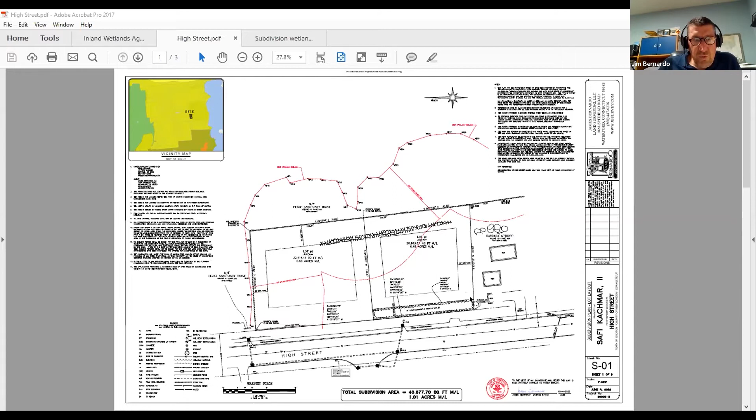So you can see from the PDF file, the red line with the numbers by it, those are the wetlands flags. And then I've indicated the 100-foot upland review area. This is an RS20 zone.

If we move to the next page, there we go. We're not proposing any activity, obviously, in the wetlands. It is on the adjacent property, as I said, but he'd like to subdivide this into 2 properties with 2 pretty moderate size houses. He's proposing like 1,200 square foot capes with 2-car garages.

There'll only be a small amount of activity for grading in this area for the construction of this one house, and then the installation of footing drains for the house, for both houses going off the back of the slope. We've indicated we have silt fence at the limits of clearing.

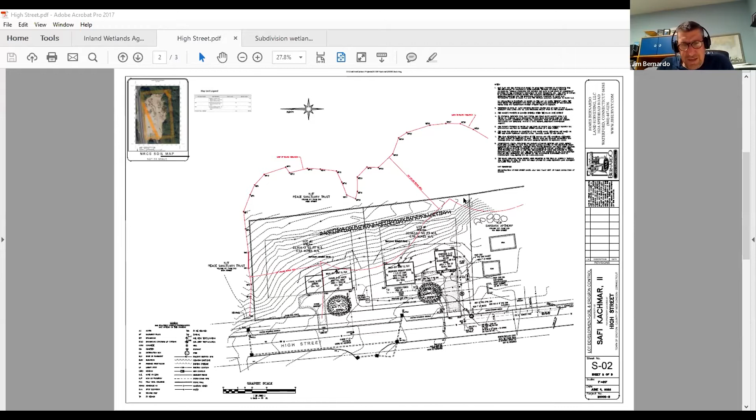This currently now is just all vegetated because of the repairs and the remediation that was done with the previous permit, so there's no tree clearing or anything. It's cleared all the way back to the stone wall on the back property line. The current property owner pretty much bought it in that condition. He kind of inherited some problems there that he wasn't aware of, but he did apply for a permit, he did remediate the slope and stabilize the slope. There was a plan prepared by Ed Wenke last year that the commission approved, and he did go through with that work. So his intent is to try to subdivide this into 2 building lots.

There's no activity in the wetlands, just some minor activity with regards to grading and some discharges for footing drains in the upland review area.

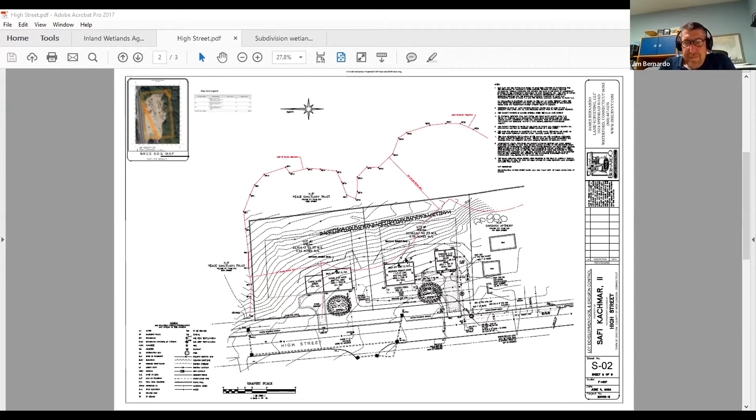Question: on that one lot, I guess it would be the southerly or west, is there a separate garage? Is that what the 2 buildings are? Yeah, this is a detached garage.

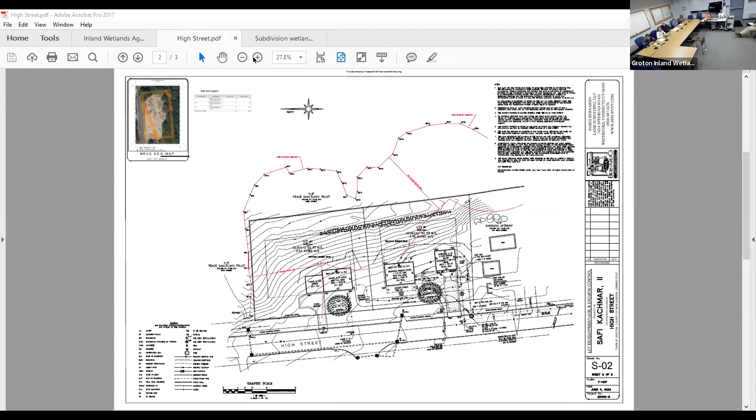Let me see if I can bring it in for you a little bit. Here we go. Yeah, this is a detached 2-car garage. This is a little cape, about 1,200 square feet. And this one here is also a cape style house, but this one has an attached 2-car garage to it. It's my understanding that he is actually building this for himself, and this is the configuration that he wants. The other lot would be for sale or for his development and for sale.

And then one other question, in that part of the upland review area and the grading that we see, is that already there? Is that part of what the remediation was? I didn't think it came all the way up there. What he did was put in this stone, I guess it's a retaining wall, a stone slope down here at the bottom to hold up the hill. And this is the existing topography from that remediation, correct? What you see there, that's an as-built condition.

Would it be possible to site walk this and see what it looks like now, since we had the pleasure to be out there before? We could. And if we did site walk that, would it be possible to put the corners or mark where the footing drains are gonna be? Sure, we can do that for you. Just the footing drain locations?

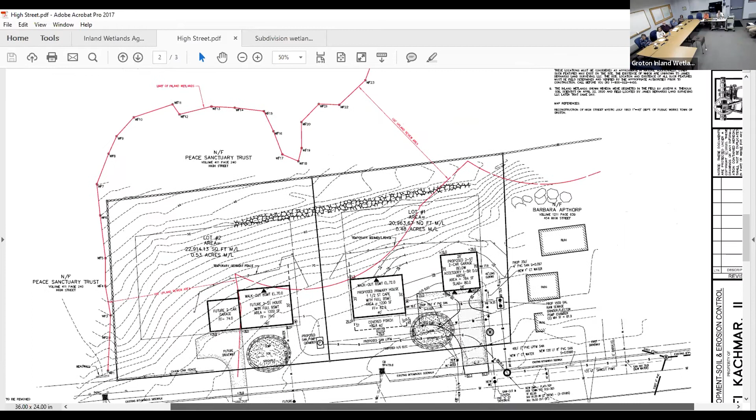And then one other question, the houses, the way you have them shown there, are they at the setback, the required setback for the road there? Yes. Or they are back, or they're at that point? No, they are at the zoning, the required setbacks for zoning. Got it, okay.

And something I might also want to note, it's not really your consideration, would be under the planning commission's review for subdivision: they will be extending the municipal sewer. It actually stops down here, and they will be extending it up to the site. Both these houses will be served by the municipal sewer system, there'll be no on-site septics for either one of these.

That true with water also? No, the water's there, here's the water line in the street. So the water line is there, they'll just be making some taps out to the street for the water line.

That red line, the 100-foot line. Yes, this one here, yep. That small garage, completely out within the 100-foot? Oh, it is, yes, this is correct, on that lot that is buildable. Yeah, well, that is outside of the upland review.

We have others that we're going to look at. Or do you want to wait? How do you want to plan? We'll let you know when we're coming. Okay, all right, that sounds good.

Will that be a weekend site walk? No, it'll be during the week sometime, after 3:30. Oh, we better do it soon, we change the clocks pretty soon, it'll be dark by 3:30. Oh yeah, I forgot about that. We don't want to think about that though.

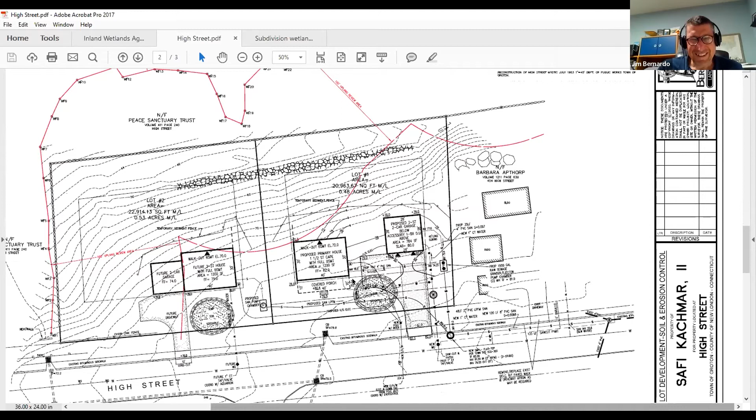Did you want to determine that site walk date and time now, or? You know, Tabitha, I'm thinking this next application, they will also want to walk, so maybe when they see, they'll figure out a time and a date.

Quaker Farm. Quaker Farm.

Good evening everybody, Greg Hanover, Director of Public Works for the town. Online I have Shelley Plude, a consultant with SLR, formerly Milone and MacBroom. You might be more familiar with that firm name, but they're now called SLR. I'll give a brief background on the project, and Shelley will get into the details of our proposal. Quaker Farm Road, if you're not familiar with it, is off of Lambtown Road, pretty close to the Ledyard town line. The culvert there carries Haley's Brook under Quaker Farm.

It's a twin 5-foot diameter corrugated metal pipe, two 5-foot diameter pipes right next to each other. About 2017, I got a call from our highway department that the road was kind of settling at the culvert. So I went up there, and the top of the pipe had dropped about 4 inches from the head wall. The whole bottom of the metal culvert had just rusted away. So the road was starting to cave in, and without a full pipe, you have no structural strength at all. So we immediately closed the road back in 2017.

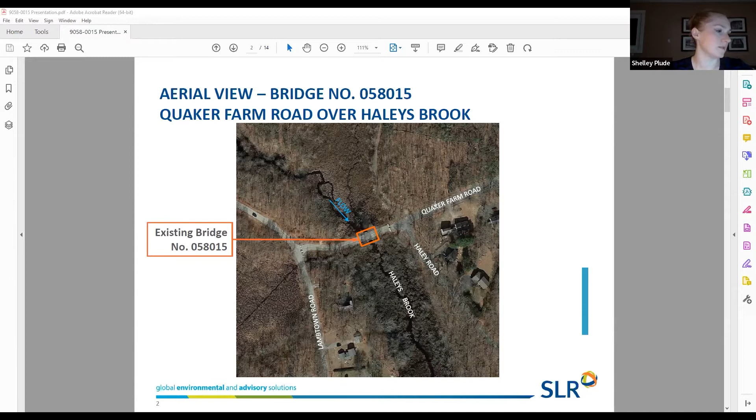So Greg already gave you a quick overview of where our project is located, just a quick aerial. It's an area that has a great deal of wetland areas. I'll show those more clearly on the next couple of slides, but Haley's Brook winds and bifurcates. There are a few splits in the channel as it approaches the existing culvert, and then extends downstream to a spillway that generally controls the hydraulics at this site, about 1,000 feet or so downstream. There's also a secondary tributary that flows under Lambtown and into the watercourse just downstream of our crossing.

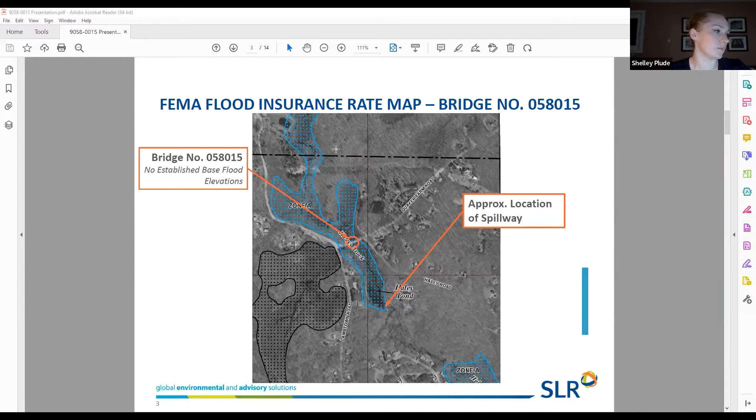There is a FEMA 100-year floodplain here, though it does not have any elevations assigned to it. Our modeling indicated that the existing twin pipe culvert, the roadway will overtop in the 50-year storm. The Army Corps standard is obviously the 100-year, so it is undersized. You can see it's largely controlled by the spillway downstream of the bridge, which is really what's governing the hydraulics. The existing culvert itself is also influencing things because it is a restriction, creating some backup north of Haley's at Quaker Farm Road as well.

Greg talked about the failure of the culvert. Here's a couple of photos of what that looks like. There's a few different things going on here. Obviously, there's a great deal of debris that's getting trapped. You can kind of see it in this upper left-hand photo.

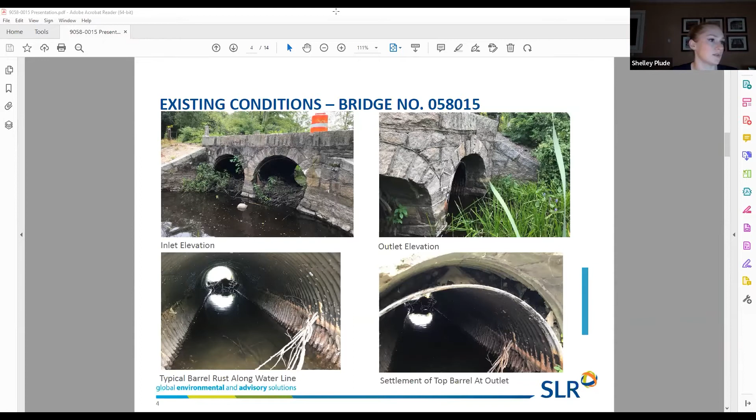The pipe is actually getting pulled in from all that material clogging and then becoming under pressure when the water level rises. There's that pipe separation that caused the sinkhole to start developing in the roadway up above. You can see a little bit of that material loss that's been occurring behind that head wall on the upstream side there, and some more shots of the condition of that pipe where you can see the steel is almost completely corroded in spots.

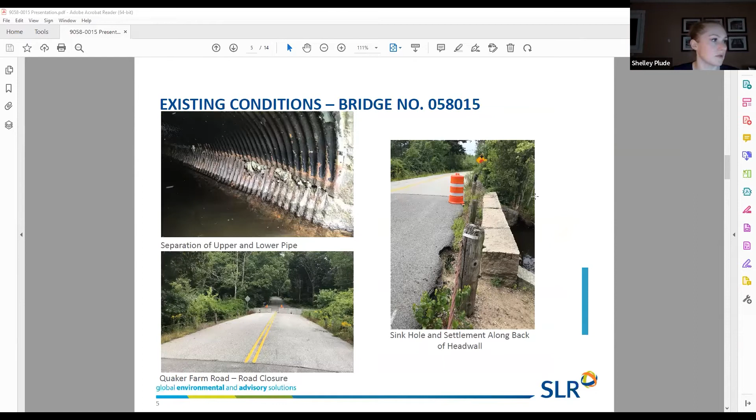And then just a general overview of what the site looks like. Obviously, we have a lot of standing water at this site. I don't think this is hardly ever dry. It's because of that spillway, and there's a quick shot of what that looks like downstream.

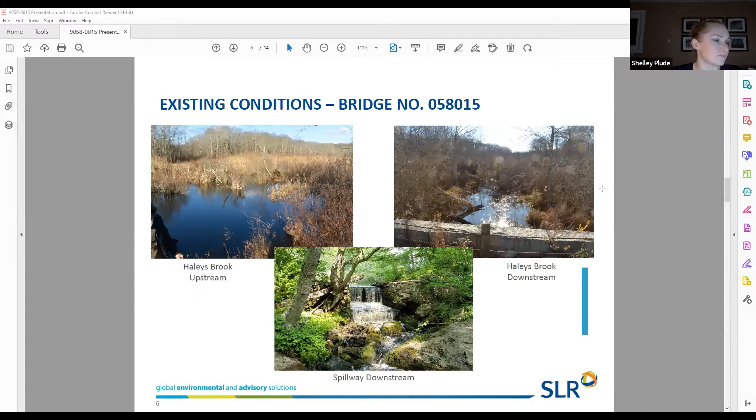So as Greg mentioned, our proposed replacement structure is a 26-foot span bridge. We did look at a couple of options, including a closed bottom box and then a 3-sided box culvert. And in order to build either one of those, we were looking at having to do a temporary bypass of Haley's Brook. We were going to have to try and stick a pipe in maybe west of the structure and temporarily bypass things around the site, just because we really wouldn't be able to construct either one of those options with flows in the current location.

Doing the open bottom bridge allows us to construct those abutments, fully construct the new channel, and then get out of the water and set the superstructure. So it did have a smaller degree of impact on the environment compared to the other two options that we looked at. And what's driving the size of the span, we went from two 54-inch diameter pipes to a 26-foot bridge, is really the Army Corps requirements.

So Army Corps and DEP want to see structures with watersheds of this size passing the 100-year storm with a foot of freeboard. And then there's also the requirement that structures span 1.2 times bank full width.

Bank full width was a little hard for us to define out here, but our wetland soil scientists did go out when they flagged the site and looked at a couple locations, trying to gauge what Haley's Brook would look like outside of the influence of this crossing and the spillway downstream. And that's how we came up with that 26-foot span.

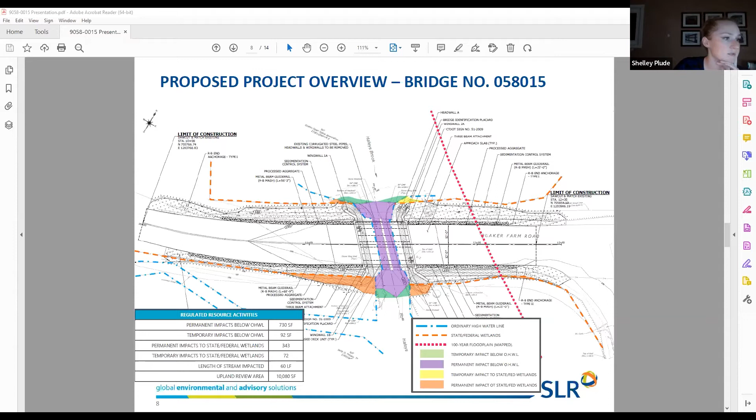The floodplain is a net cut because we're opening this up. The roadway is shown all as fill, but we're looking at an inch at most in the roadway, just to make some crown corrections within the limits of reconstruction. But it's a total net cut of about 23 cubic yards to take that existing culvert out and turn this into a clear span.

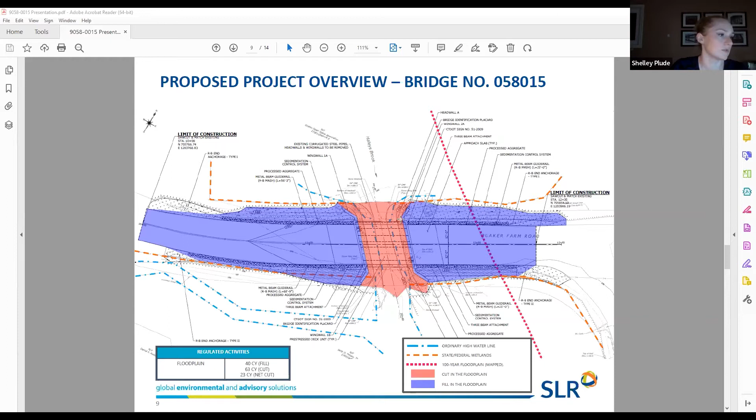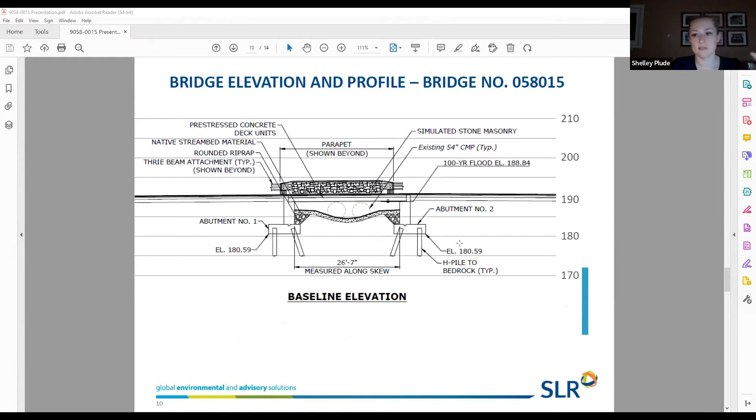And then this is the elevation view of the bridge. Because we're going from two small pipes to a larger bridge, we created a low flow channel so that we're not just releasing all of this water downstream. Obviously it's still controlled by that spillway, but we're helping keep things confined, so during low flow events we're not dewatering the area upstream of the bridge and causing a secondary impact on the wetlands upstream.

This was also part of our design, to keep that channel elevation higher to preserve the water surface elevations in those low flow storms. But that's generally what the channel will look like once completed, and it will be reconstructed with native stream bed material rather than angular riprap or something non-native.

When we're building this, the abutments and excavation will be confined in cofferdams. They'll drive sheet pile cofferdams, install the piles, install the abutments, and reconstruct the channel. We're supplementing that with a temporary pipe to help control the water during excavation, since there'll be a lot of groundwater they'll be working with.

This also allows us to do the channel grading completely confined, so they can do one side of the channel at a time, shift back and forth, and keep the site contained while doing all this work. Once the abutments are complete, they can finish the channel and be out of the water for the remainder of the project—placing the superstructure and doing all the roadway work with no further in-water work.

And that was another benefit of this alternative compared to the others we looked at—it allowed us to get out of the water quicker.

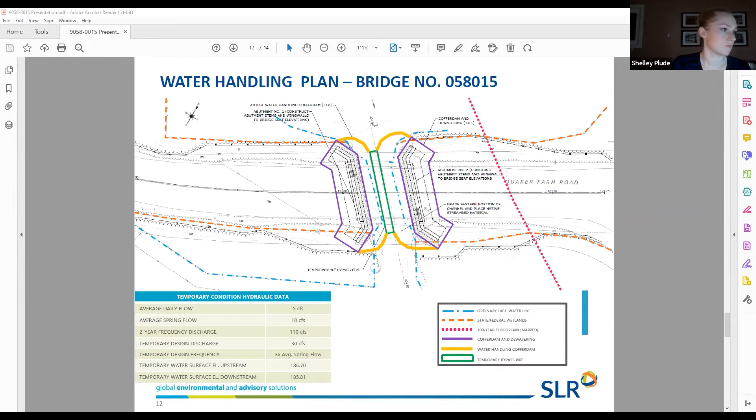As far as other coordination to date, we've been cleared by the State Historic Preservation Office, who gave us a no adverse effect finding. DEP has given us a cursory sign-off; we're still waiting for the formal paperwork, but because of that downstream spillway, fisheries is not concerned with fish passage. Our permanent condition will be significantly better than existing, and the temporary condition will be more or less what's there today.

We have a few NDDB species—I believe whippoorwill was on the list, but it's largely a matter of timing for tree clearing and similar measures, which will be included in the documents. Northern long-eared bat and monarch butterfly were flagged as federal species, but we don't have any hibernacula for the bat, and the site isn't particularly conducive to monarchs either. So from that perspective, we should be fine with all the NDDB species that may or may not be at the site.

DEP and Army Corps have agreed to qualify this project under self-verification, which is their lowest permit classification. In addition to that, we're seeking a permit through your commission. That concludes what I have, so if there are any questions, I'm happy to answer them.

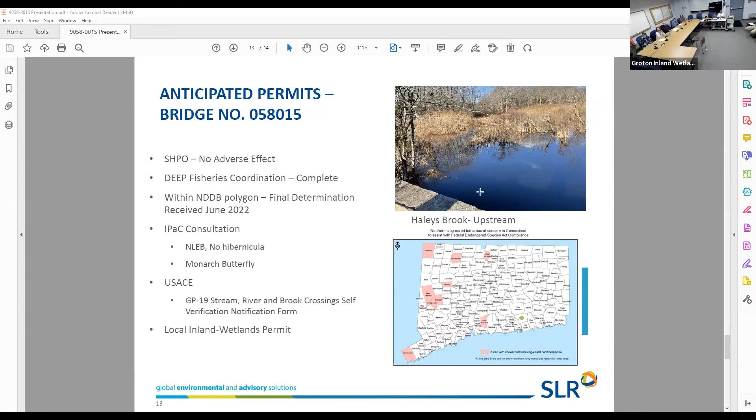I had one other question back a few slides, when you were showing the new bottom of the bed—that one, can you explain that to me a little more? I'm sorry to be so feeble-minded. Sure, so we're basically now trying... I'll try and zoom in if I can.

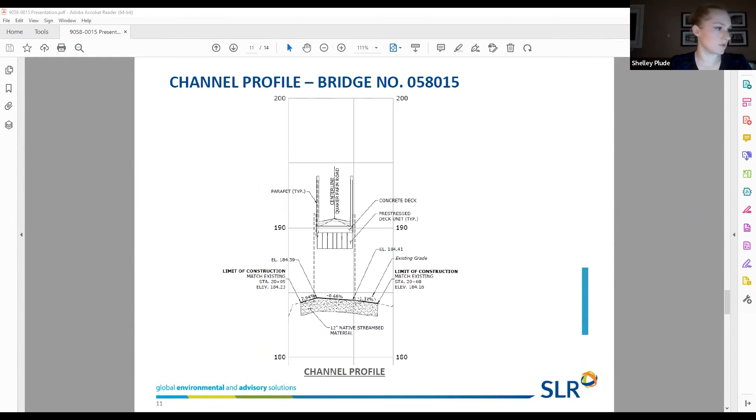We're trying to match the existing grade, actually raising the invert at the upstream end slightly. It's a little hard to see, but there's a scour hole upstream, as is typical for these types of culverts, and the invert of the existing pipe is about... let me see if I can point to it.

Is this a cross section? This is the profile of the channel—if I'm standing on the road and I've cut the bridge in half. And this is what the channel is going to look like.

So we set this elevation—the inverts of the pipes are actually slightly lower here, but we raised the channel because we're playing a balancing game. We want to lower the water surface elevation during major flood events, but during the 1-year storm we don't want to impact that number, because we don't want the wetlands to decrease. So this profile was developed from our hydraulic modeling to maintain those water surface elevations at the 1-year storm and under.

How do you maintain that profile when you have moving water? Under these conditions it's actually very slow moving, so the velocities are pretty low. That was one of the things we looked at when developing the design—did we need to reinforce this with some sort of stone weir? But the velocities we're looking at are very low, so we're not anticipating a great deal of scour, unless that spillway downstream were to one day get removed, which would change things. But if you go out there, there's very little velocity under normal conditions.

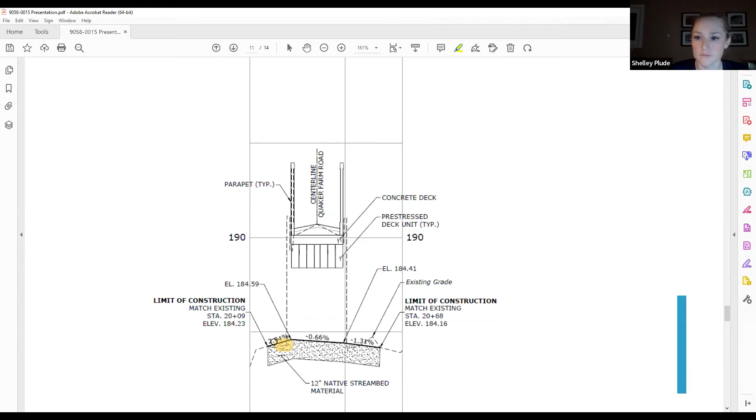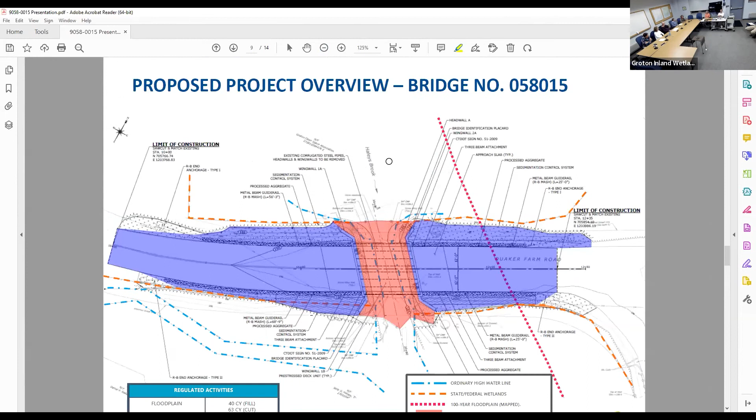I think I know where this area is—is this right before the horse farm, the Avery horse farm? And this connects two neighborhoods, right, Lambtown Road and Haley Road? It hasn't been working for a very long time—about 5 years.

It's got Jersey barriers there. It is a secondary means to the Lambtown Road neighborhood. Right now Lambtown Road is closed in Ledyard—there are gates you used to be able to get through, but in an emergency there's really only one way in and out of Lambtown unless you go all the way through Ledyard. This kind of opens up a secondary access extension, because going through the horse farm now is not an option. So these residents really have just one way out.

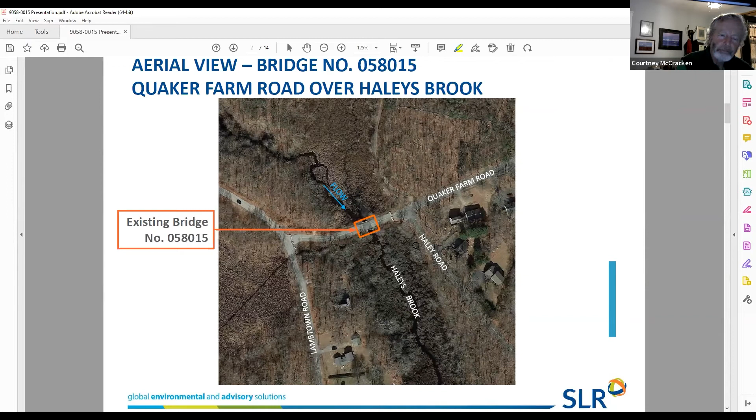Can I ask one question—you said the banks were vertical now. Do you think this will improve the erosion of the stream banks? Yes, because we'll be regrading this whole area and restabilizing it. Are you referring to the banks along the channel, or the roadway embankment? Well, I thought you meant along the channel, that they were vertical now.

It's more that the pipes slope down—it's not that they're vertical, they just slope down. The grading we need to do for the guide rail to be installed properly requires a shelf; there are dimensions we need to meet for the guide rail. So we need to create a 2-foot shelf and then slope down from there. These banks are steeper on this side, but I wouldn't say they're vertical. The erosion on the upstream side is really because of material getting lost through the headwall due to that pipe separation, which will be addressed when this comes out.

All right, I'd like to look at this. I think we definitely need to look at it. Just remind me, what's the threshold for public hearing versus non-public hearing? I ask every time.

Generally, it's whether you find this to be a significant impact on the wetland, typically 100 square feet of disturbance or fill, but that's not a hard and fast regulation. So do you want to wait to classify this until you site walk it? Yes, please, you can do that.

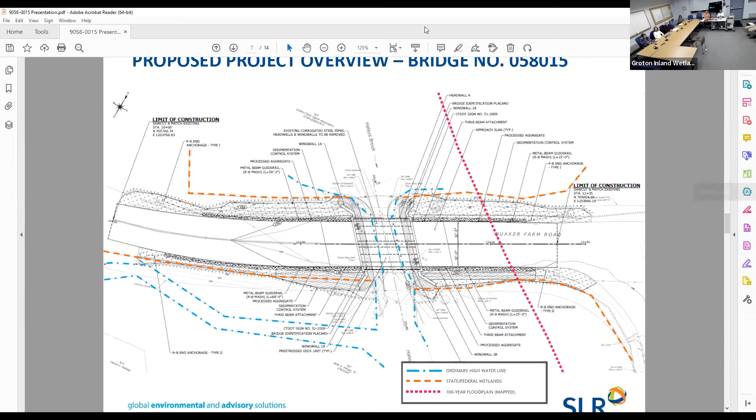Would you like me to attend that site meeting? That's up to you and Greg, really. Okay, we'll notice it and you guys can decide what you want to do. Thank you, I figured, yeah. Okay great, thank you. Thank you, Shelley. Thanks, Greg. Good night.

All right, 147 Pequot Avenue.

So there's something funky going on with the camera, I'm just gonna let you guys know, but we'll see. I don't know what all these numbers are, but I think you can still see the plan. The last one, we had a young person doing it, and he was like, yep.

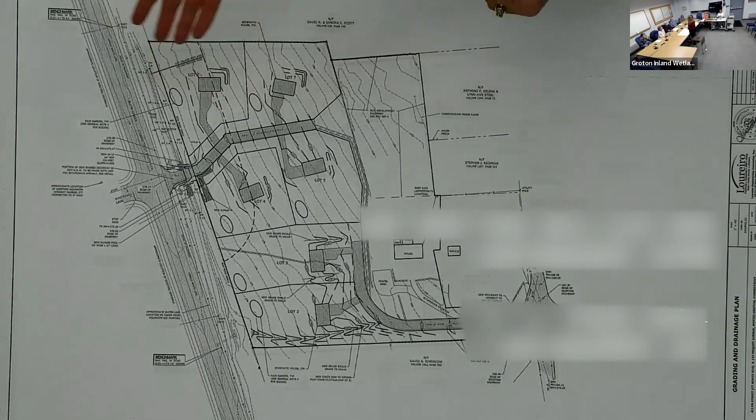I'm Susan Marquardt with Loureiro Engineering. We were before you a couple months ago for our inland wetland permit. We also went to planning and zoning and got approval for the subdivision. Since then, we received a DOT review letter that asked us to put a plunge pool on the lower end of the culvert under the driveway, and that is in the wetland pocket. So in talking with town staff, it was recommended that we come back and review it to determine if we need a new inland wetland permit or how we want to handle this additional activity in the wetland.

Why do they want a plunge pool? Just to slow velocity down so you don't get erosion downstream, right? Right, that's the basic idea of a plunge pool. So whatever drainage comes through, it'll slow it down and protect it so it doesn't scour or wash out. Just walk us through what that would involve.

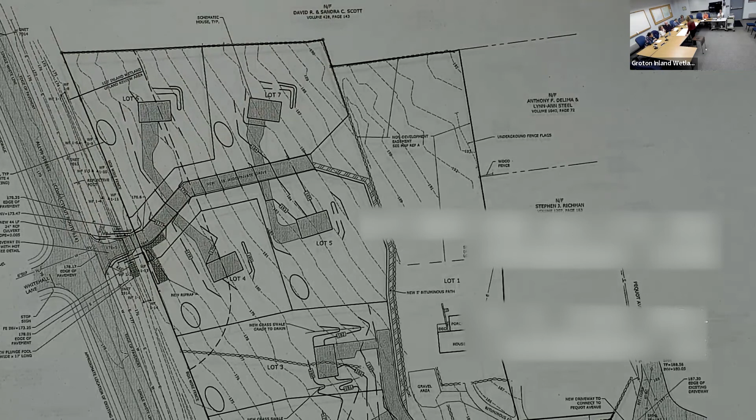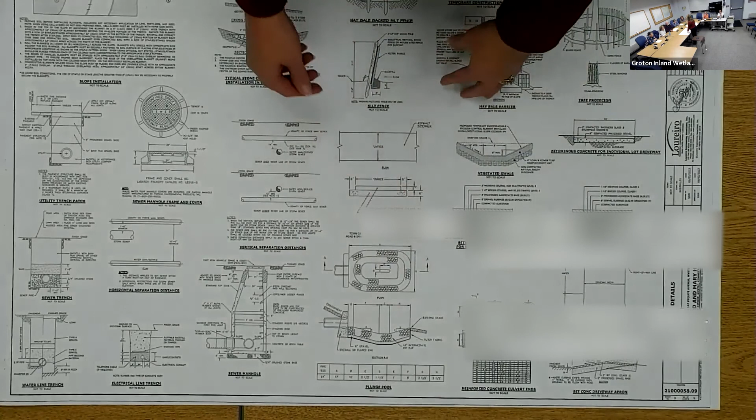Yes, I have a detail which may be a little clearer. This is the detail for the plunge pool. Basically, it's just 18 inches of riprap, a little indent at the lower end of the culvert with riprap. So how much are you excavating then? How deep is that? It's 18 inches deep, 18 is the riprap plunge pool.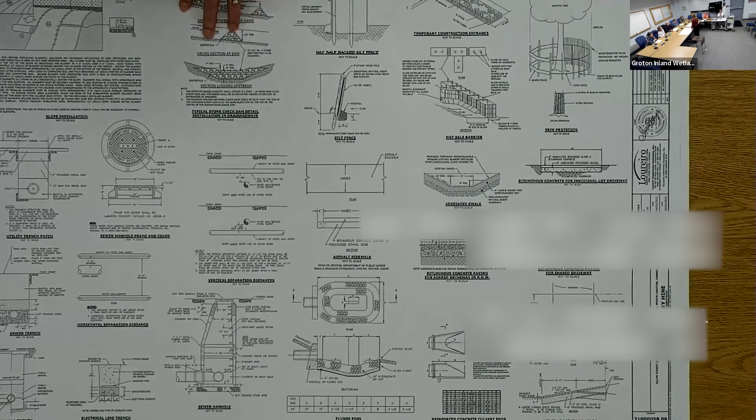The top of the stones or the bottom? That's to the bottom. So this is a plunge pool, in a...

I'm not sure we need a permit. I've never seen water in that thing. I know, that's why I'm like, why did you need a plunge pool? I have seen water. Well, who knows? But I don't think we need a permit for this, it's something that probably should have been done.

So it wasn't clear, I couldn't tell Susan it's okay to install it without talking to folks, and I didn't want to slow them down, so they went ahead and applied for a permit in case you decided you do want to permit this. So they're in the system. You wouldn't be able to take action until the next meeting if you decide that. If you decide there's no permit necessary, then everything just goes back to you. Your call, it's based on your advice.

I mean, I don't see it as needing a permit. I don't either. I suppose the only thing was if someone were to take us to court and we didn't have the proper permit, but I don't think so. I get in theory what you're saying, but you know what I'm saying. Yeah, if you feel like you...

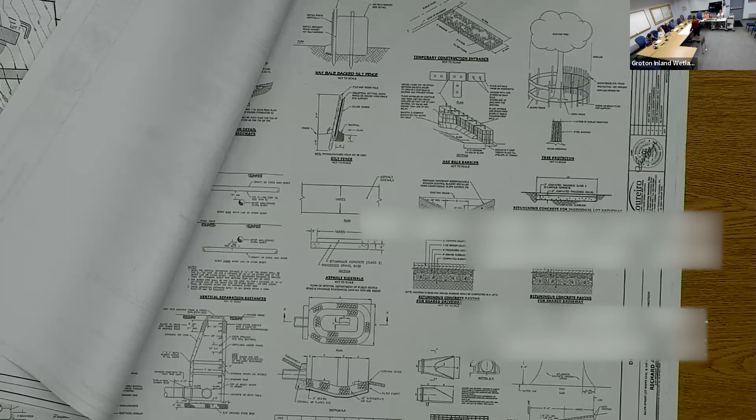Can we amend or modify the permit? You can, but you'll need to wait to do that at the next meeting. But it's a DOT thing, Department of Transportation, they have the onus since it's on their property.

I'll do whatever, I tend to like to do the right thing. That's all, I just... because I've been in a different position.

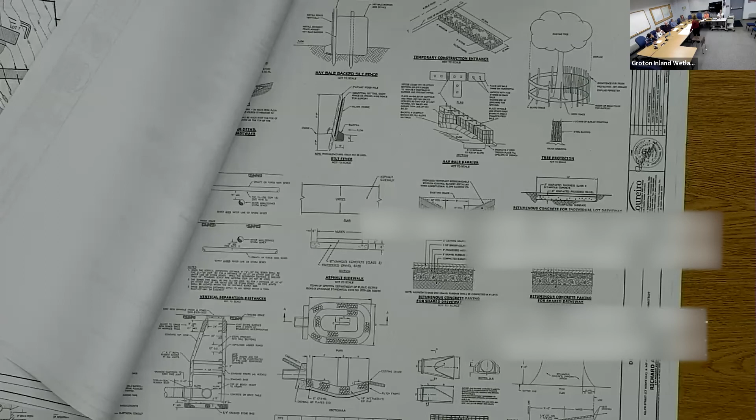How badly is that going to mess you up if you have to wait two weeks? Pretty bad, but I don't think two weeks is going to hold up the process. I'm happy to do this, no worries. We're still waiting on official DOT approval as well, and they don't move too quickly. I'd suggest we err on the side of just making a quick modification.

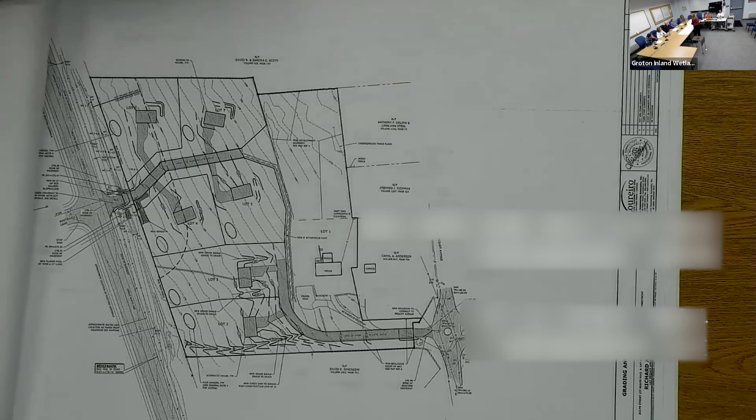We will have this on the next agenda for action. That's why we came back to you, to make sure everything's good. Would they classify it as a minor modification? I mean, yeah, because essentially you're taking action on it as though it is.

Motion to classify the Pequot property as minor. I should say you're an abutter too. Yes, I think you recused yourself last time. I did, right. I'm not sure that's important, but you just have it on the record. Yeah, but I'm definitely an abutter. Definitely an abutter, yes.

Do we have a second on this? I seconded it. Okay, those in favor signify by saying aye. Aye. Opposed? Abstentions?